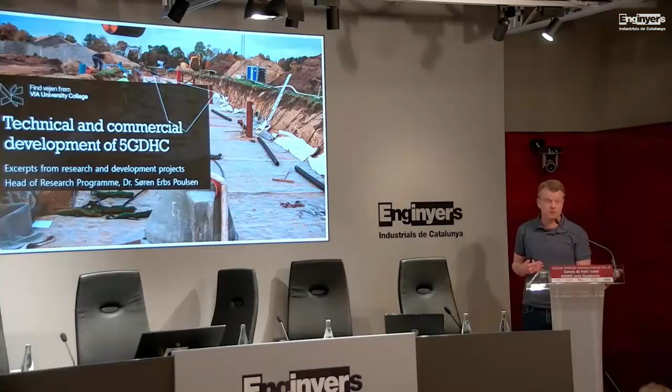I'm Søren. I'm from VIA University College in Denmark. I'm head of the research program for energy and climate. And I'm here to talk about technical and commercial development of fifth generation district heating and cooling. And just as Søren, I'm going to use ThermoNet for the rest of the presentation because it just rolls off the tongue a bit more easily.

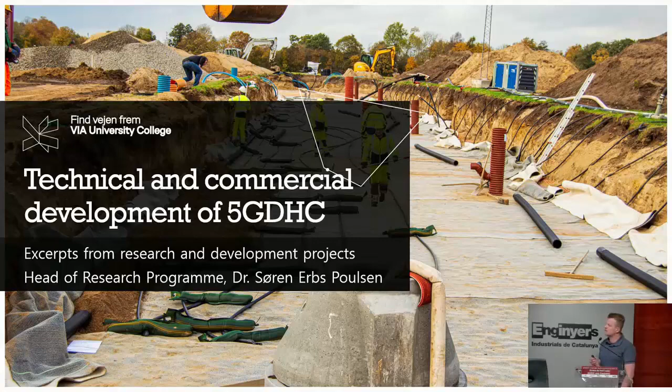I will try to flesh out some of the points that Søren has made, especially from the technical point of view. What is the added value we get from these systems? Søren has already talked about this shift in paradigm, and it is very difficult. It's something you have to be humble about.

There's this nice figure that tells you if you have to go from research and invention to commercial application, there is a very difficult phase that you have to traverse. And the reason for this is as your TRL, or your technology readiness level, increases, the funding declines as well. And at this particular point, there may not be a lot of private financing or investment that wants to pick up the technology. So you have this minimum of funds being allocated into this new technology.

And you end up in what some refer to as the valley of death. A lot of good technologies have died here because no one really understands how to get through this phase. And this is something that you will have to do as well here. You have to get across the bridge and not fall off into the valley of death.

I'm a researcher myself, but I've realized in my career that as a researcher, I don't really have any impact. If I want to have an impact developing new technologies, I have to get across this bridge and into commercial application. This is where you have an impact and you can make a change. So this is what you have to focus on.

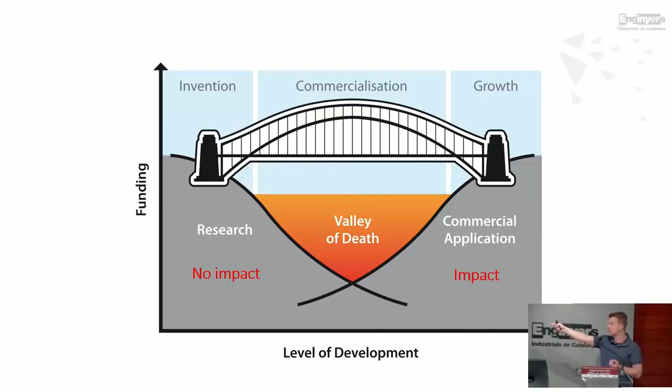So what do we find in the valley of death? There are many things that can go wrong. There are competitors. And then there's what we call the value proposition. What is it that we can provide with this new technology that is better than our competitors? If we can't say it in really plain terms, really quickly, then the competitors are going to beat us at it. So this is really key to commercial application.

Once you have a good value proposition, you also need to address issues like business models and risk management. So who's going to own what? Who's going to be the operator? Who's going to take responsibility when things go wrong? And so on. This is also extremely important, obviously.

Then typically on the national level, you have different types of legislation and regulation that apply. There may be some EU regulation, but usually on the national level, some legislation applies that you need to deal with, you need to understand it fully, and you need to address it completely and consistently.

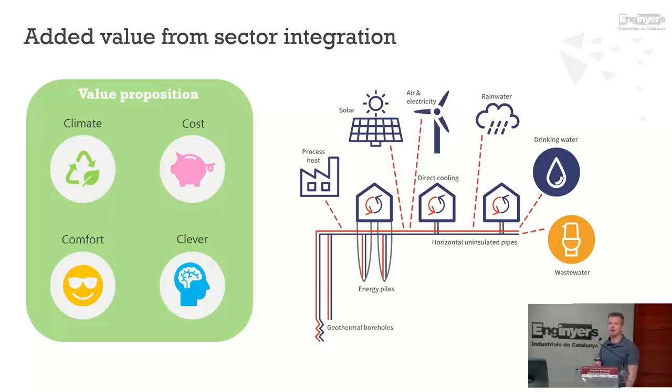So I want to focus on one particular aspect that I've been looking into more consistently recently, which is sector integration. So as you can see on this figure, there's a lot of different sectors that can contribute energy to our thermonets. We have industrial heat, process heat. We have electricity, for instance. Surplus electricity can be converted to heat. Rainwater, drinking water, wastewater. We also have foundation piles. Maybe some of you are familiar with this technology.

Energy piles. So an energy pile has 2 purposes. It serves as a way to ensure structural stability of a building. So it's something you have to put in the ground no matter what. It's a sunk cost in that sense. It's infrastructure that we have to build no matter what. The cost of adding a few pipes to these piles is very low. We did a research project where we found payback periods for energy piles, also for district heating, 4 to 6 years, because the upfront cost is really severely reduced.

So the whole idea about sector integration is very interesting from a cost efficiency point of view. We can integrate with the water sector pretty easily also. In Denmark, we have a lot of rainwater. We have constant problems with surface water and flooding. And there's a lot of energy in this water, and it's easy to utilize. Also wastewater, this is always present and easy also to utilize. So there are many possibilities, and this is going to be the theme, at least of the first part of my talk.

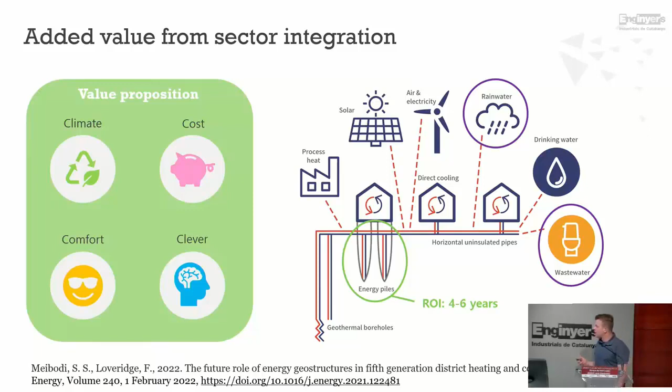So we have proposed a new type of energy geostructure. So energy piles are a part of what you call energy geostructures. It can be tunnel walls, diaphragm walls, all these kind of structures in the ground that we built. We can use them to exchange heat. So we've been working for about 4 years now on a new type of energy geostructure where we use roads, which is an essential part of our infrastructure, as a new type of energy geostructure.

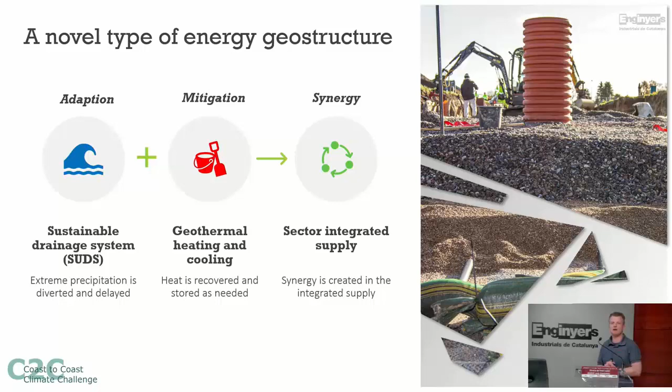The idea is to combine a sustainable urban drainage system with a geothermal heating and cooling system, that is a thermonet. And then we combine 2 sectors. That is, we combine water management with energy supply. So we get a sector-integrated type of supply that has more than one functionality.

So the basic idea is to use the geotechnical structure that we have below pavements to ensure that when a truck drives over the pavement, it doesn't crack, it doesn't move. We refer to this as the roadbed. It's typically made up by gravel that is porous, so it can contain water. So when we have problems with flooding in Denmark, this could serve as a potential basin for storing water.

The second idea is to put geothermal collectors into the roadbed as well. So we are digging this hole no matter what. We might as well put in several things that serve several purposes. That is to use existing infrastructure that has to be constructed no matter what. So this is sort of the idea.

You can see the black geothermal pipes of the thermonet. We have the drainage pipes in the sides that drain off water to a water brake. So we have a controlled discharge. No matter how much water is in the roadbed, we have a controlled discharge to the sewer system. So we create synergies from combining these two types of utility and supply. So there's a benefit for our thermonet, and that is that we increase the heat extraction because we are trickling water on these geothermal pipes, so we see improved heat extraction.

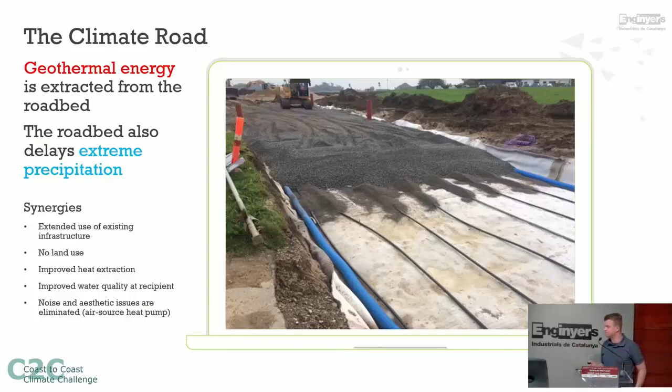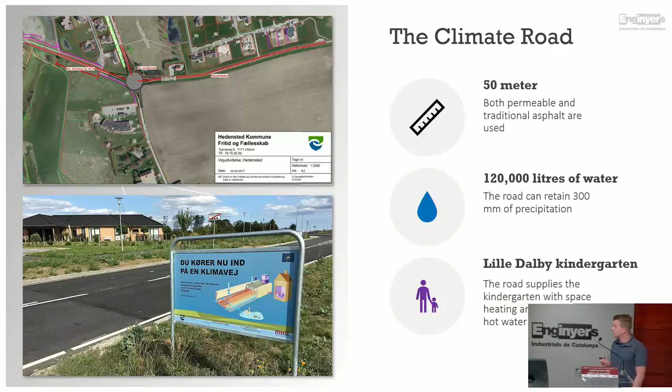Okay, so we actually built this in full scale. So it's always nice to have these drawings where you can have a lot of good ideas, but when you have to build it, it's something completely different. So we have 50 meters of road somewhere in Denmark. It can contain 120,000 liters of water. This corresponds to 300 millimeters of precipitation if the roadbed is empty of water. That's a lot of precipitation. It supplies a kindergarten with space heating and domestic hot water.

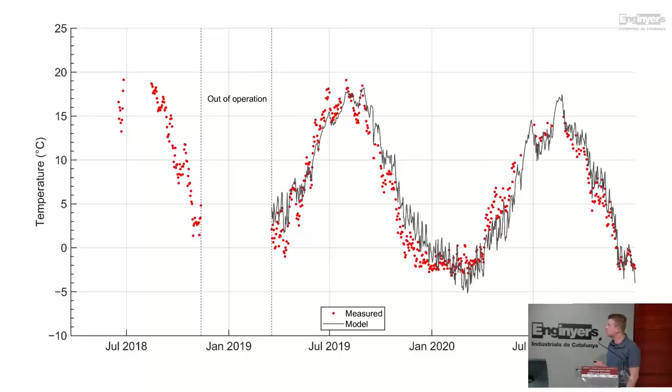So we put the system into operation, supplied the kindergarten with heating and domestic hot water, and we monitored the brine temperature. That is the temperature in the grid for this period here, a couple of years. And then we tried to model it with a computer model, a mathematical model that we developed. The details are pretty gory, so I'm not going to show those, but you can read the paper on this. So with this model, we can explore different scenarios. And I want to show you some of this added value.

One could ask the question, what is the impact of infiltration on our heat extraction? Well, obviously it's positive. If you look at the blue curve, then you have increasing infiltration to the right of your x-axis. And you can see an increase in heat extraction that goes all the way up to about 35% if we infiltrate a lot of water, 2,500 millimeters per year.

So the next question is, what if we want to do seasonal energy storage? That's another hallmark of thermonet. That is that we can inject heat into the ground and then use it later on. Is this eroded by infiltrating water? It turns out the groundwater flow velocities are low enough to preserve some of this energy.

So the red curve shows this shift upwards in heat extraction that you gain from fully balancing the ground. That is, you put as much energy into the ground as you extract during winter. So this is added value. This curve that goes up, this is added value, or synergy, from combining these two types of utility.

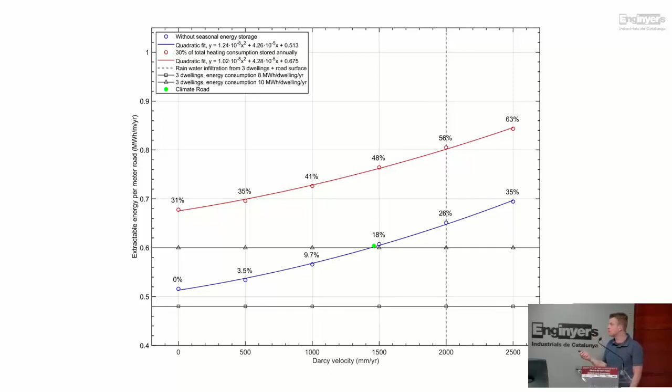So we found in this paper that the climate road can supply 3 to 4 new family dwellings, and that's pretty much what you can fit along 50 meters of road. The infiltration increases the heat extraction by 26%, and seasonal heat storage can increase this number to 56%. So the idea is that when we have these dwellings, we take the water from the roofs and so on, and we direct it into the roadbed to prevent flooding. So this is a key feature.

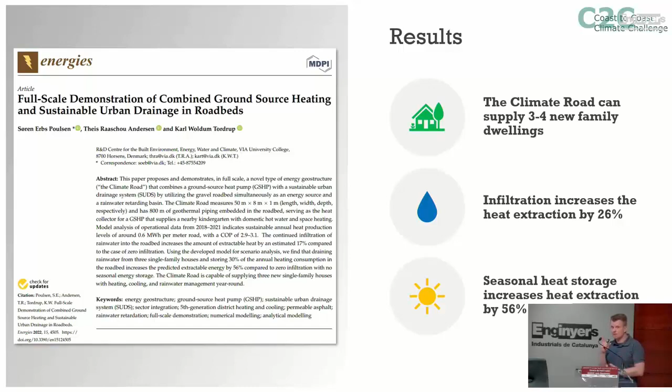So we took this idea even further to see if we can do even more, and this is the second version that we have worked with, and we have actually done a full-scale demonstration of this as well. So we have, in this second version, established a thermonet as well. We have individual heat pumps in the buildings. Now we have borehole heat exchangers.

This is mostly for backup reasons, but also to be able to supply consistent cooling, because the roadbed tends to get warm in the summer because of the close proximity to the ground surface, but also the very hot asphalt, which actually contributes quite a lot of energy. Then we have a heat exchanger along the central wastewater pipe to reclaim some of that energy lost from the domestic wastewater. And there you see the waterbrake to have this controlled discharge to the sewer. So this is combined energy efficient, sustainable district heating and cooling and surface water drainage. We call this the Thermo-road.

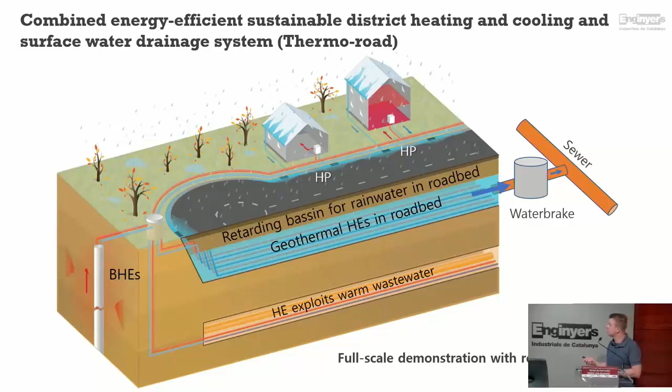So here you see it, the big manhole, concrete manhole in the front of the picture is where we have the waterbrake. This is very essential. To create value for the wastewater company, you have to be able to guarantee that the discharge rate is at a certain level all the time. This is the idea of retardation of water.

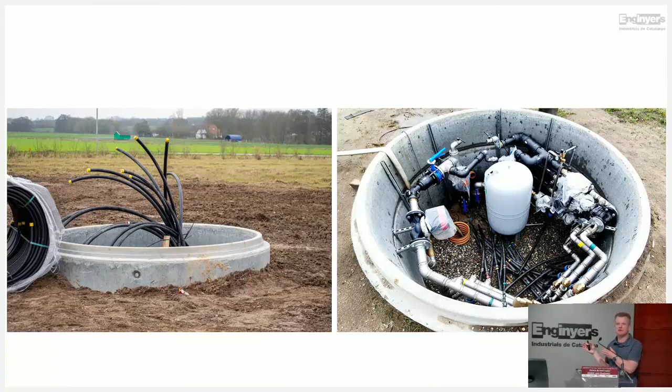Bentonite lining and the geothermal piping again. And in the back we have the borehole heat exchangers. And then we have this very large manhole. This would not look like this in a commercial application. It's 2.5 meters in diameter. But it's because we have a lot of measurement devices. We have temperature sensors, flow meters, and so on every source.

The next step now is to actually sell those parcels and populate them with houses. And we're struggling a bit with that. But once we put it into operation, we'll have a system that is extremely well monitored. And so we can use a case like this to validate models and so on, and also as a showcase.

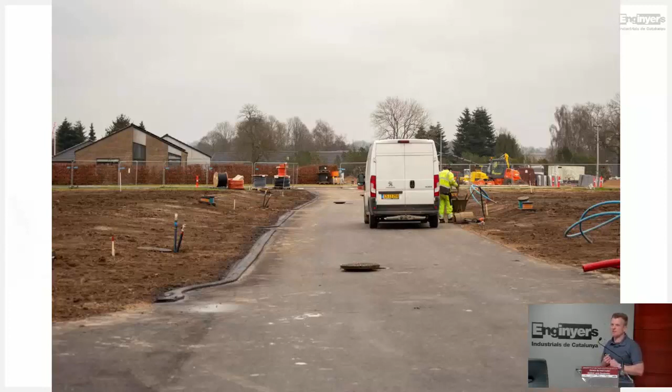Actually, the latest development is that one of the biggest contractors in Denmark said, we would like to do a case here with really lovely buildings and so on, but the municipality has said no, as they often do, because if the computer says no, then we can't do it. So again, you have this resistance in this valley of death.

This is the road pavement, and you can see the connection pipes to the left, the blue pipes, or no, the black pipes protruding from the ground. So you just connect your heat pump and then you're going.

Okay. Now on from this sector integration, I want to finish my presentation with some ideas and concepts from this project, Cool GeoHeat. This is an Interreg project with these partners shown here, where we try to do a more sort of holistic view on everything that is related to deploying thermonet.

So these are the different work packages that try to go around all these aspects, both technical and commercial, operational data for one. Do we have any operational data from existing systems in Denmark? And what we find is, because it's commercial application, there's pretty much zero, because there is no money for instrumentation or measuring devices. These operational data can be used, as I mentioned, to validate design models, to see that they actually are in line with the real world.

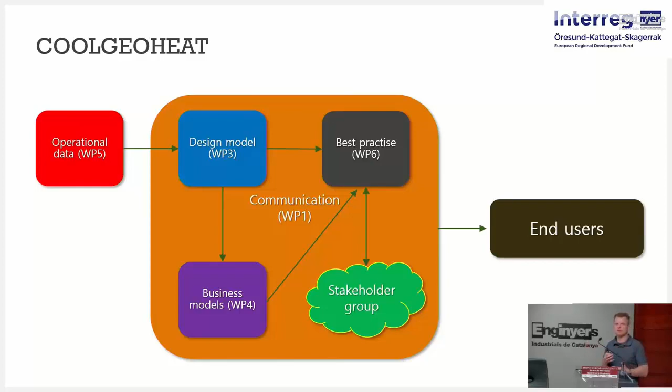So we did a case study on a thermonet in Denmark, this thermonet in Silkeborg at Balle Bygade. It's a very small thermonet, not too small. We have 15 houses, 14 new builds, 1 existing house. So you have different heat pumps, 6 kilowatt for the new houses, 10 kilowatt for the existing house. We use 6 geothermal drillings as a heat source, drilled to a depth of 120 meters.

The interesting thing about this case is that this grid is actually owned and operated by Silkeborg Utility. This was a research project, but the business model turned out to be that it's the publicly owned Silkeborg Utility who owns the grid and also the heat pumps. So this is an interesting business model.

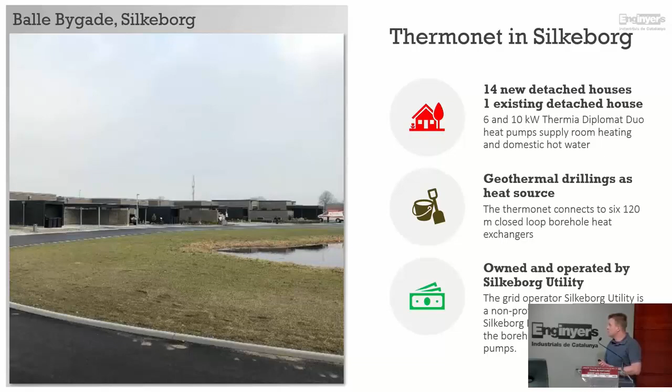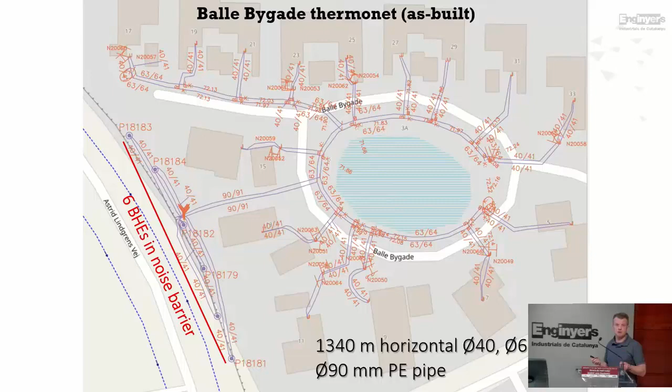We have 1,340 meters of horizontal pipes, and don't forget, in traditional district heating, this is not an asset. It's a source of loss. You lose about 20% of your heat in traditional district heating. Here, it's a part of your production capacity, so it's an asset. It adds production capacity, and I'll show you how much.

So we built a digital twin of Silkeborg, so we need these models, as I mentioned, to be able to make predictions about these systems, both from a technical point of view, but also from a cost point of view. So we use the Modelica platform. Some of you are probably familiar with it. It's a very powerful way of modeling complex connected systems.

So we have models for boreholes, we have models for heat pumps, and then it's possible for us to connect it into a very intricate model of these systems. On top of it, we've added a cost module, so we get the life cycle costs when we do the technical simulation. So very nice tool. But also very sort of elaborate.

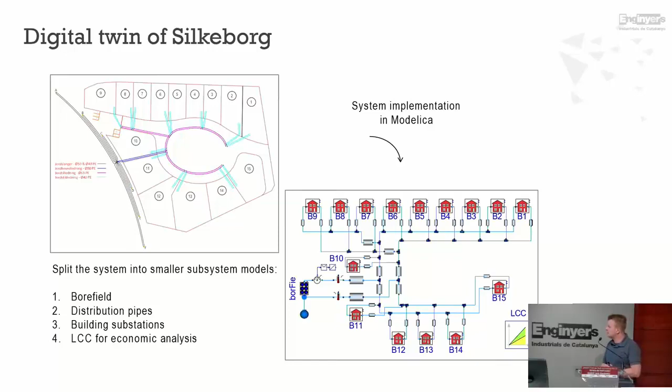So you get a lot of interesting key performance indicators from these simulations. You get the brine temperatures, for instance. That's vital to your performance. You can't have brine temperatures that are too low, or in case of Spain, too high if you do a lot of cooling. You get the thermal exchange in the grid itself. You get the seasonal performance factor, which we know for Silkeborg is, for odd reasons, not very good. But we also get that with the model. So obviously, maybe we can solve this problem by using the model.

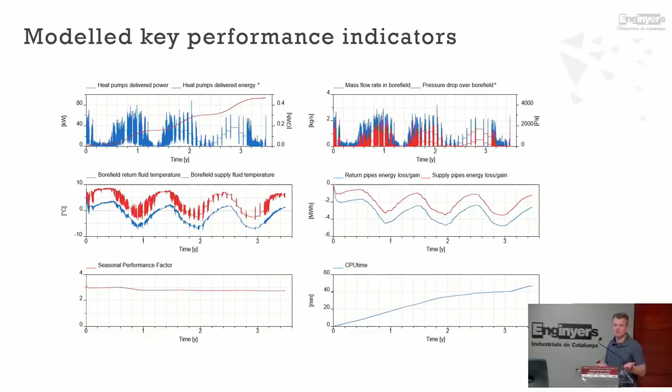But notice here, CPU time: 3.5 years simulated takes almost 3/4 of an hour. This is not practical for a company to use Modelica. So this is a research model. So we've been working on a fast design model at VIA. I started the development of this code last summer because I thought this is necessary. This design model is much faster. As you can see, it takes less than 1/10 of a second to run.

Provided all the necessary information, it gives you what kind of pipes should I use, how big should they be, what is the production capacity of the grid itself. In this case, for Silkeborg, it's around 36%. So we get 36% of the peak load production from the grid itself.

So the take-home message here is you need to look at the graph to the right. If we had to do individual solutions for these buildings, we would need 1,345 borehole meters. That's quite a lot. The Thermonet is built with 720 meters, a great reduction. Where does this reduction come from? Thermal capacity in the distribution grid, and then diversity factors also apply.

Diversity factors means that when you have peak demands in one house, it's extremely unlikely that you have a peak demand at the neighbor at the exact same time. So peak demands don't stack up when you connect people in a grid. In fact, the diversity factor here is about 2/3, so 65, 66%. So that reduces the need for borehole meters.

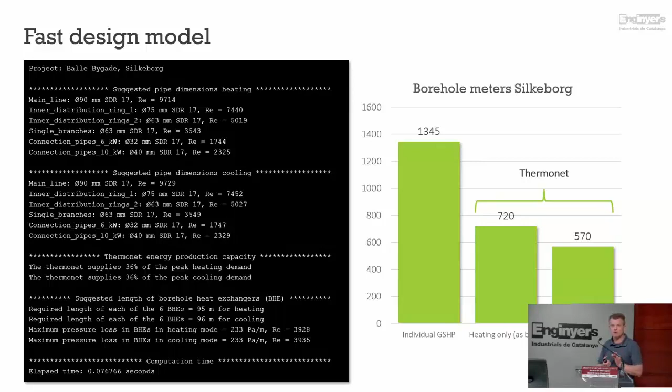Now, if you balance the ground, you can reduce the amount of borehole meters you need even further. That is, you add the energy to the ground that you subtract. So we can go down to 570 meters according to this tool here. So clever use of resources, more efficient use of every borehole meter. This is what you also get with Thermonet.

We developed some business models that can probably work for Denmark. The first model is split ownership, not so different from Ken's model. We have a private entity of some sort. We don't really know what that is, but it could be this company, Sustain. They will use pension funds to mature a project, plan it, and also get the decision phase done, and then construct the grid. Once it's up and running and the risks are gone, they hand over the keys to a public district heating company. So the ownership changes.

The district heating company owns and operates the grid, but the consumer owns and pays off the heat pump. And these heat pumps are procured in large quantities by Sustain to get the benefits from buying large volumes of heat pumps. You would never be able to get that as a private consumer if each had to buy the heat pump. The second model is that the public district heating company will do everything, and they'll also own the heat pumps. This is the model used in what Søren showed in Vridsløse Magle.

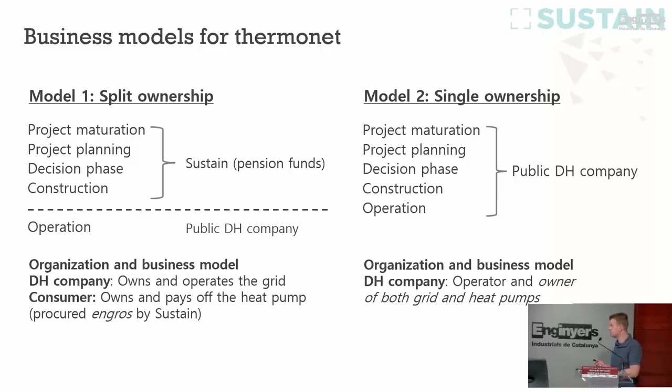Okay, so just a few concluding remarks. Be aware of the valley of death. I really want to stress that ThermoNet is a well-proven technology. So don't get lost in more research projects. Don't get lost in many demonstration projects. Try to find a template that works, that you can replicate again and again. So focus on commercial development.

Define a value proposition that is desirable to the decision maker or the end user. Otherwise, they're going to turn it down. I don't know who that would be in Spain. Then determine what is required for this value proposition in terms of the upfront investment and variable costs. Is it competitive? What type of cost structure is the end user willing to accept? Business model and risk management: who owns what and who's the grid operator?

The organization, this is also very important. Who supplies the solution? You can't have a lot of different actors. You need some sort of unified approach. Consider a one-stop shop concept. That seems to be a common theme to those that are actually successful at commercial application. Financing and government incentives: aim for consistent financing solutions and fully utilize incentives if such are available. So this is the work you need to do.